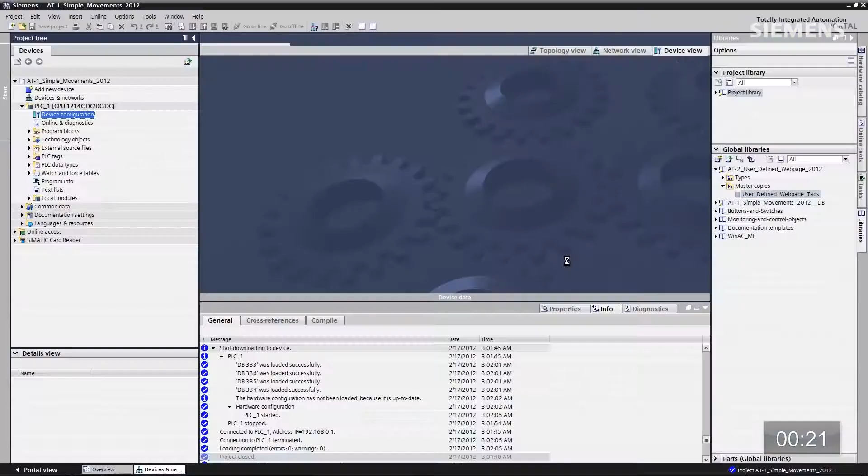That's it. So now the project is opened. Just go to the Project View section of it. I'm going to choose the PLC. Double-click on the device configuration, give focus to that CPU, click on Properties, and in the Properties, the first thing that happens to pop up is the integrated web server.

If I check this box, there's a little security note that pops up that tells us, hey, wait a second, do you want to have a password? For this application, I don't want to do that. All I got to do now is give focus back to the CPU and click Download.

Now he's going to compile the fact that there's also a web server integrated with the code of the CPU. Click Load. Now finished. Now we have a web server integrated.

If I go over to this iPad, first thing I want to do is click on Settings, go to the Wi-Fi, enable the Wi-Fi, and as you can see, I actually do have a wireless access point for this particular project right now. It is S7-1200, that's the one I want. I'm choosing that, and next thing I want to do is go to the browser.

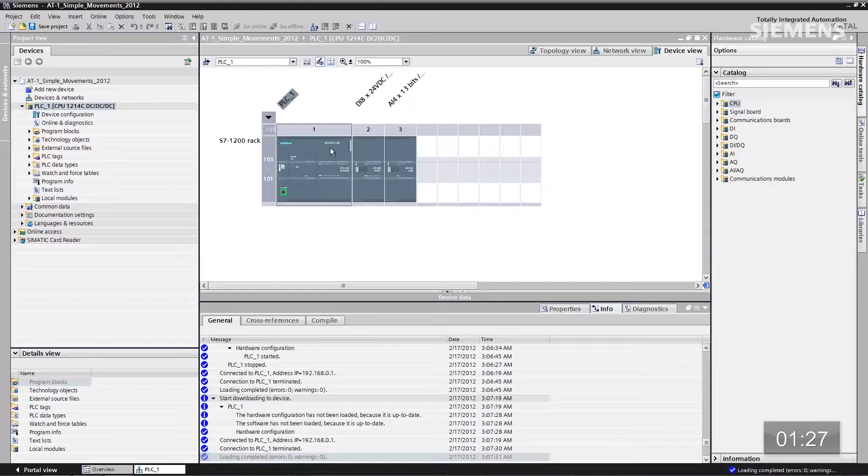I want to find the IP address for the 1200. All I have to do is give focus to it, right click, Properties, go to Ethernet address. There's my Ethernet address. Click on the field, and 192.168.0.1, go. So now I have the web server up.

If I enter it, the first page is an example representation graphically of the 1200 with the status LEDs, green, red, whatever they may be, including some basic information, IP address and part number. We've also got an identification page that gives a little bit more detail about this unit, as well as a communication page. So the next thing is we can actually create faults, for instance, with this automation system.

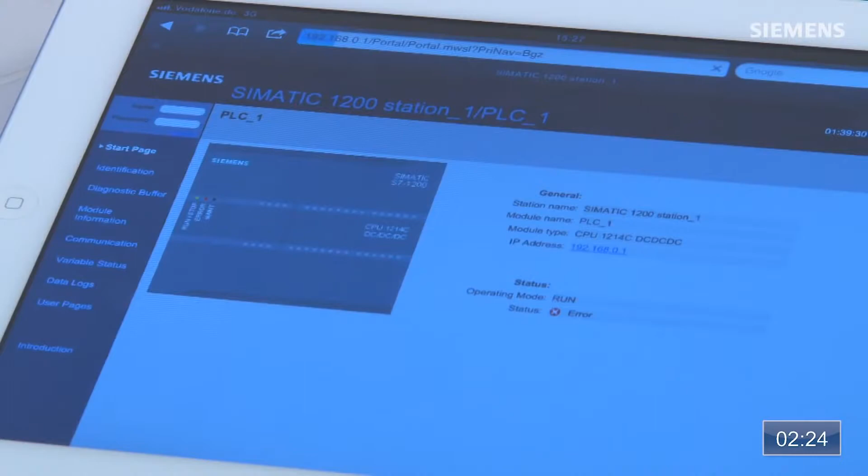If I go over here and turn the potentiometer and create an analog fault, I'll notice that I get some status LEDs on the first page. Something is wrong. What I can do is go to the module information page, and I'll see some red wrench here. If I click on that, now it actually tells me that the analog module has something wrong with it.

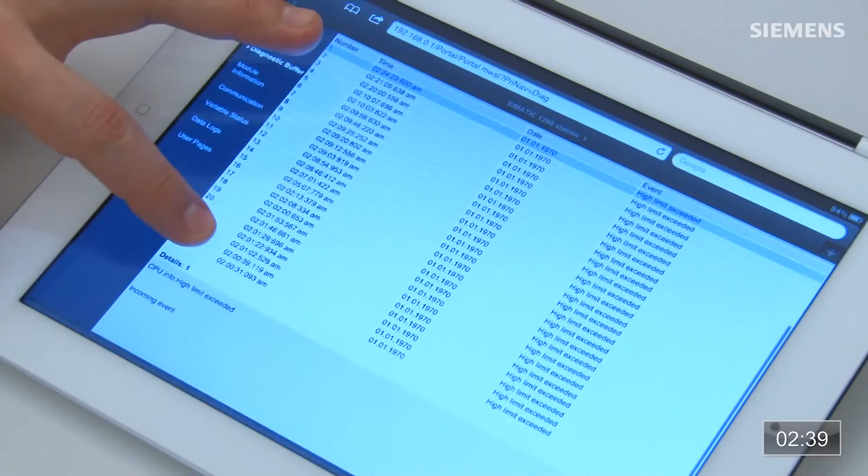And then I can go to the diagnostic buffer, just like I would in the engineering system, and ultimately I can see I have a high limit exceeded on channel 0. Once I realize what the physical problem is, I can go back to the system, solve the problem, and then even in the web server I'll see and recognize the fault has been solved.

Next thing that we can do is we can go to the variable status page, and as long as I know the tag within the control system, I can monitor any variable I want. So let me clear this one. And let's type in one of the variables that I know for this particular program. Click Go. I can actually see the status of this particular bit.

In this instance, this is motor 1. This is a seal-in circuit we have in this program. If I go over here and turn it on, I can actually see the status has changed. So you can monitor any analog, digital, bit, byte, word, whatever you want to in this particular web server.

So we're able to see all the diagnostics that a 1200 system can provide right out of the box, even in our web server. Next step is control code. Wouldn't it be great if we could tie control code directly to the current automation system and command it from this iPad? Let's do that.

First thing I want to do is go to the main OB. Here's our standard seal-in circuit. I need to tie the virtual logic to the actual logic in this particular system. What I want to do is add some ORs. So there's a normally open contact, and here is a normally closed contact. And what I want to do is tie it to our tags from our global library.

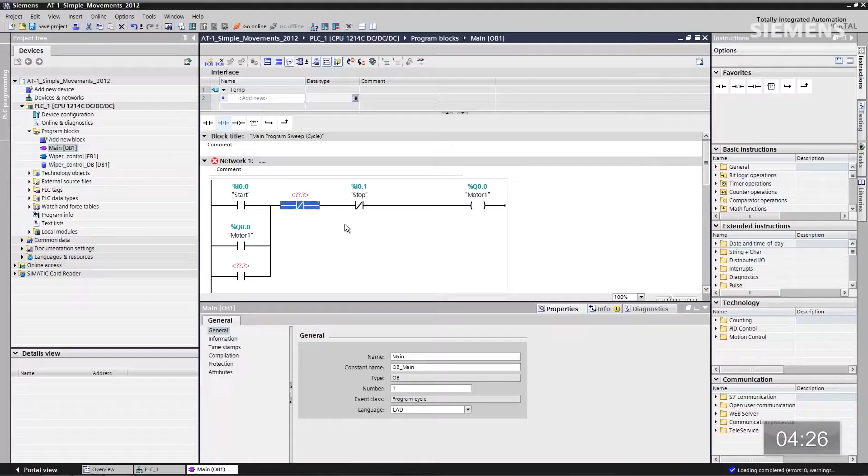What we're able to do is create HTML code for a web page. You can put that in the global library and reuse it over and over again for all of your smart devices, including the tags associated for code for those. So let me go to the library. Here's our user-defined tags. Let me pull them back into the project.

Now it physically has my tags and this code, and all I have to do is tie them together. There's the stop. There's the start. So now our virtual logic and our actual logic are now tied together. The next step is we want to add a www block because this is going to be a user-defined web page, and we want to be able to call this virtual logic against the actual logic in the CPU.

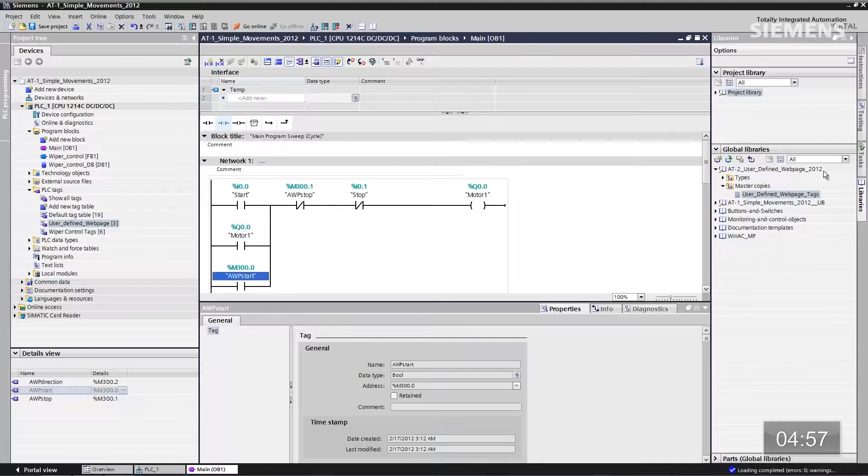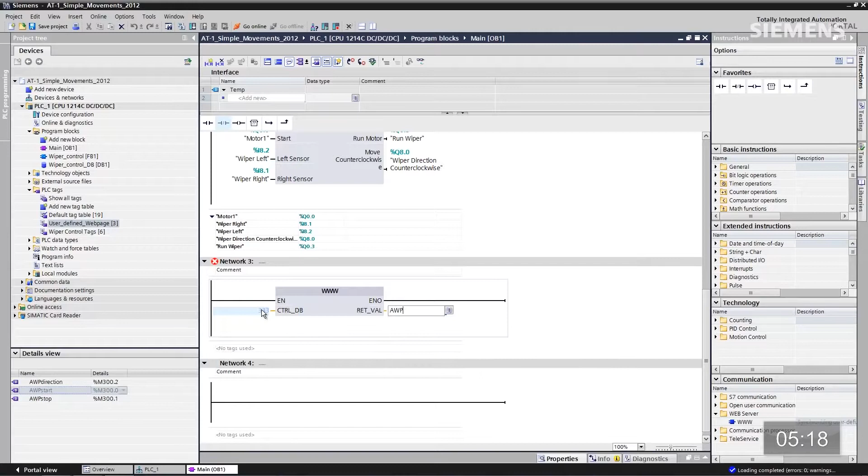Let's go to instructions, web server, and let's add this block. There's the www block. The control data block is always 333. And the output, I'm just typing in a tag name, AWP, and I'm going to use a default define tag. It's fine, whatever the default is, I'm okay with that. So now all of our logic for the control code is now complete.

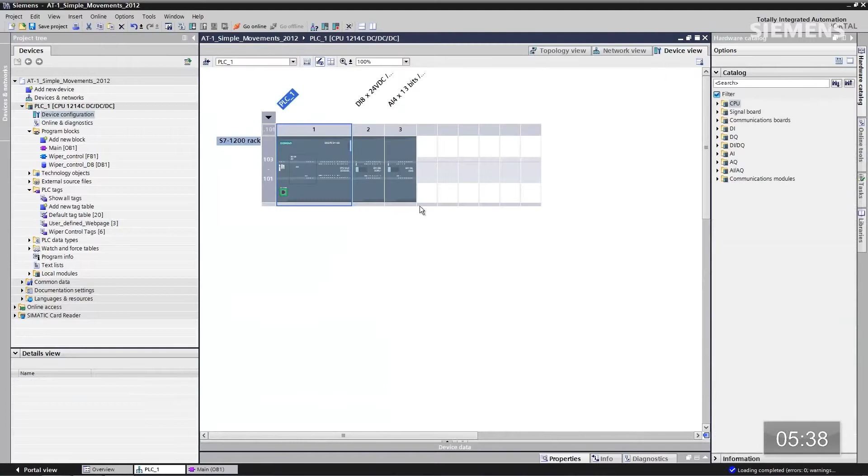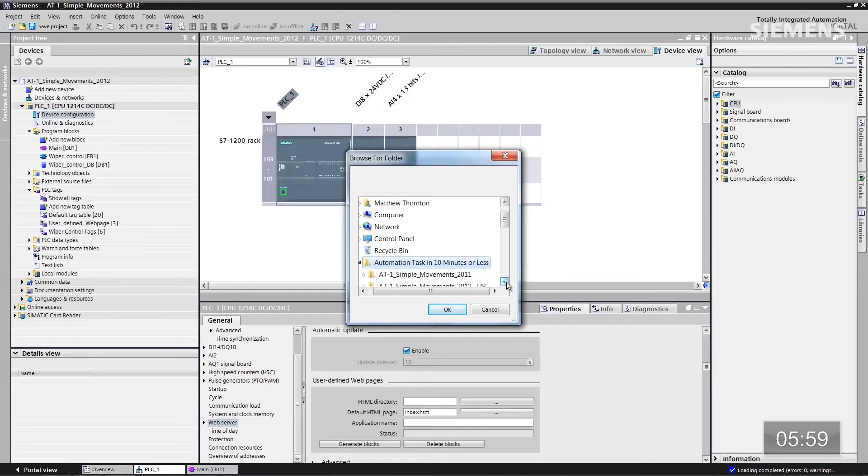Next step is the HTML actual web page itself. What we need to do is go back to the device configuration, give focus to CPU, click on Properties, and then go down to the Web Server section. And we have two fields here. The first field is the HTML directory field. So let me go find the actual point where we have this in our system. It is that one. Click OK.

And then I actually need to point to the page as well. So the page is called index. Click on Open. So now all I need to do is click this Generate Blocks button. So we'll actually generate the actual HTML code for the web server in the system itself, and we'll put it into the actual project. Now that they're there, all I have to do is give focus to CPU, download that.

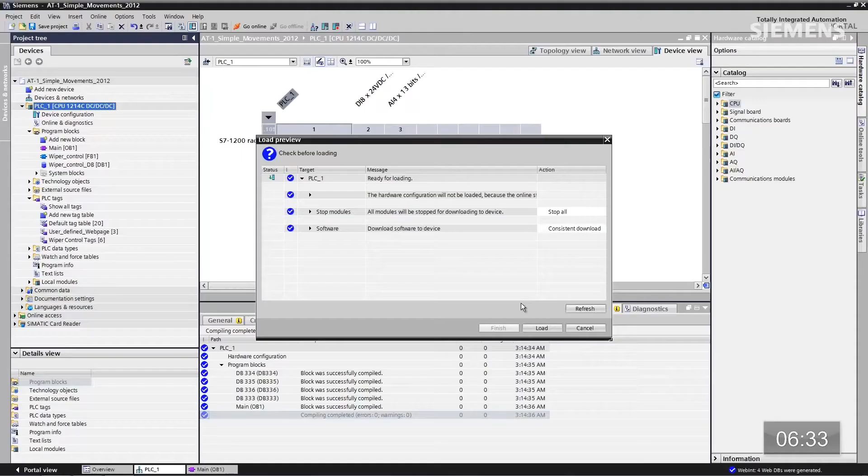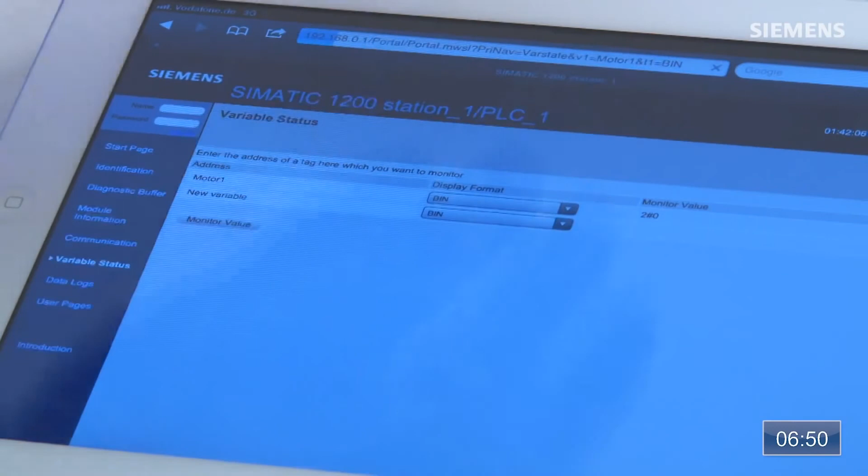Now it's going to compile the user generated web page along with the code. Click Load. And then last but not least, we can click Finished, and we should have a fully functional system. So now the code has all been downloaded to the CPU. All we have to do is go over to the iPad. Let's refresh the standard web page. I can choose User Web Page at the bottom and launch it.

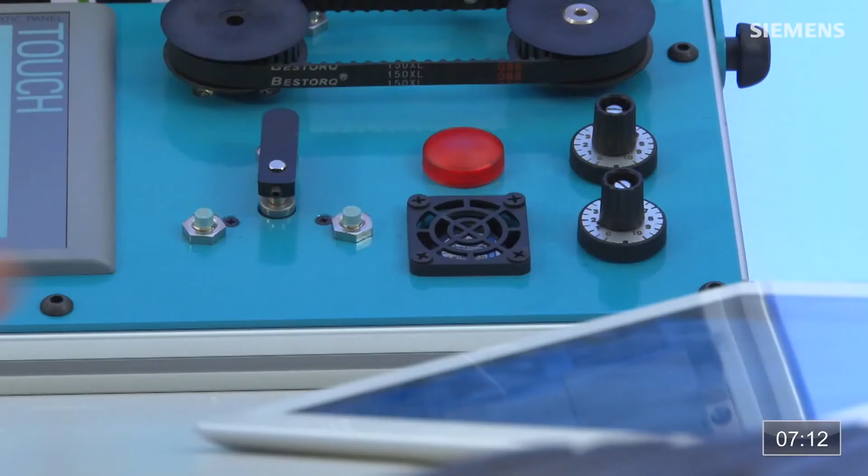Now I have my user-defined web page for control functionality. I have a logon screen as well, which we didn't create a login, so we don't need to use it. And we got a control screen as well. I can click on Start. And as you can see, I can completely control this automation system with this iPad, and I did it in just a matter of minutes. Now that is engineering efficiency.